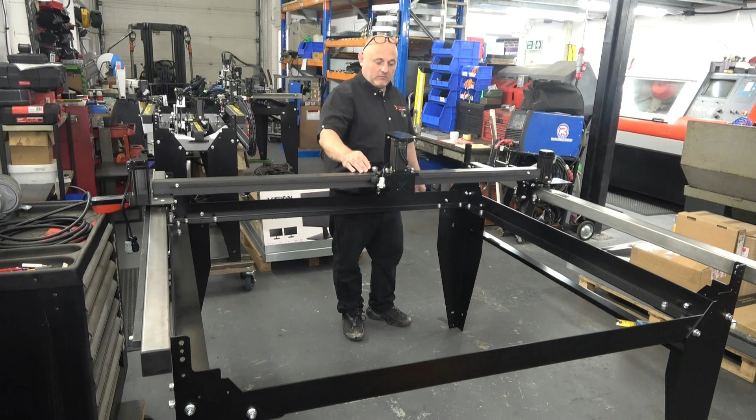Welcome to the first in possibly a two-part series of videos all about the latest software and the latest upgrades that Rob from Xtreme Plasma is now incorporating in the latest tables.

I sent the control box, the PC and the Z-axis away to Rob at Xtreme Plasma. It came back, the Z-axis has been modified, there's a new little PC and modified control box. I fitted it on at the table, a bit of wiring, nothing out of the ordinary, simple enough to do. Really good, comprehensive instructions. I quite enjoyed doing all the mods - it gives us a good chance to tidy things up.

I've stopped using the console and bought a little cupboard, not an expensive one, I'll show you that. So all the stuff now is inside there, away from all the nasty sparks and dust.

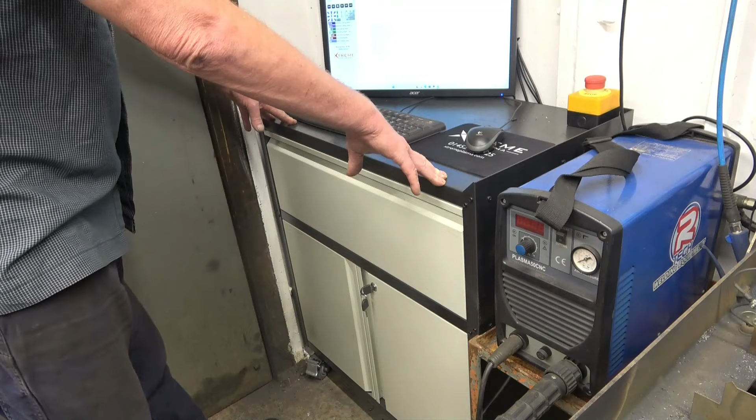This is the little cabinet I bought. It comes flat packed, didn't take much putting together. Screen on there, keyboard, mouse and mouse pad, and I put the stop switch on there, the e-stop button - that's very important so you can get to that. It's got a drawer here which as usual is full of my junk, but you can keep your nozzles, welding screens, all your consumables, things you don't want to get dirty.

I open the cupboard door, the control box is in there. That's a new little PC, quite an incredible little thing. Everything's out of harm's way. It gets quite warm in there with the heat off this, so I've put my welding rods in there to keep warm and dry out. I'm really pleased with this setup, I should have done it years ago.

I'm still using the R-Tech 45 amp plasma cutter I've had for a long time. I think I'm possibly going to get one of the new ones and do a review on that, but this has been no problem at all - it's been a good little cutter.

Originally I had the PC screen mounted onto the wall up here somewhere. It didn't take long to realise it wants to be here because you're sitting here, you're working your PC and there's no neck strain, it's absolutely spot on. So I'm going to take that off and get a desk mount for it.

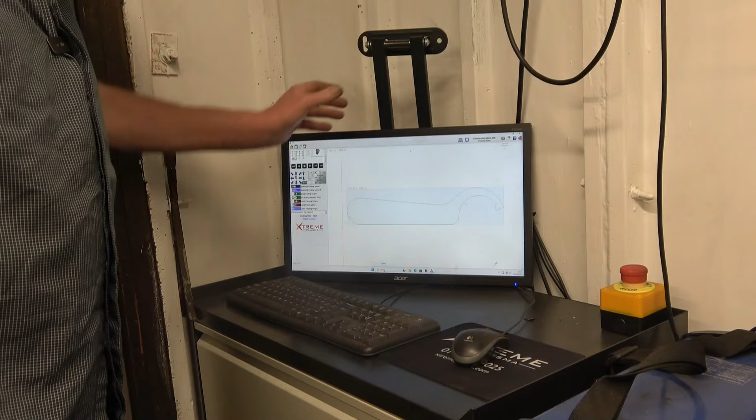I have played with the software, I've read the tutorial. There's loads of tutorials online to show you how to use the MyCam software.

I do fancy a weekend away, so the wife and I are going to go down to Gloucester to Rob's factory, and Rob's going to give us some one-on-one tuition on this software because he knows it inside out. I'm going to ask the sort of questions you don't find being asked on YouTube videos - not stupid questions, but how do you do this, how do you do that. Rob will hopefully show exactly how it's done.

In the second part, I'm going to go more into the mechanical side of things, the latest upgrades on the newer tables he's building. I started off with a 2-foot square table, a really little one, and progressed up to a 2x4. It's got all the latest updates on it, carriages, stepper motor drives, loads of different bits and pieces, and now I've got the latest software.

So this 8-year-old table is up to date - that's the way he's designed them. Everything is retrofitted, so you can go back to the first table and something off the first table will fit something on the last table.

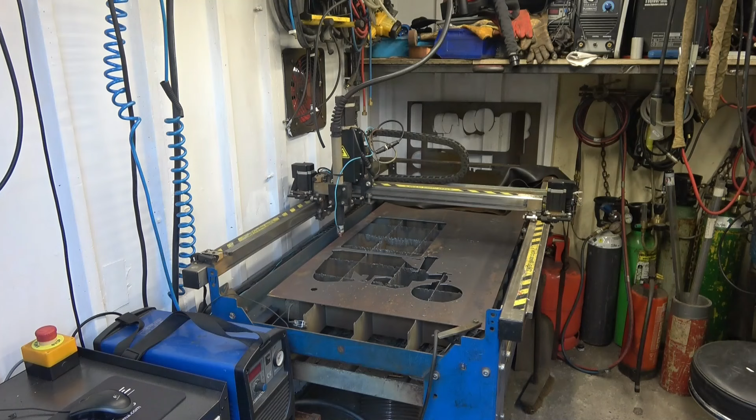That's obviously my table, 2 foot by 4 foot, in exactly the same place as it was. I've got some wiring to tidy up, the blue wire, that's the new ohmic sensor. That's the thing that does away with the old-fashioned torch height control - that in itself is a game changer.

I've just shown the table setup I've got now with the new software in. I've actually got to run down to Gloucester to see my friend Rob at Xtreme Plasma, and I'm going to get a bit of a tutorial on how to use the software. The tutorial that comes with the software is pretty good, but you can't really beat one-on-one with somebody that knows what they're talking about. So I'm sure Rob's in here somewhere, we'll have a look, see if we can find him and see what the day brings.

Hello John. Hi Rob, how are you doing mate? Thanks for coming down. Nice to see you. Pleasure, anytime. Welcome - well, it's a bit of an Aladdin's cave, being a welder and a motor mechanic. I'm amazed at how much stuff you've got in such a small space.

We've got everything, yeah, I have. And so you're stocking the R-Tech stuff? The power weld stuff as well - the new range is fantastic. So you actually stock these units as well? Yeah, I got them in.

So what we do is we've got them in stock, so people come to our shop, they can take them away. That's good. Because I don't like how some shops advertise that they can drop ship and all that. We like it so people can come out, we can talk about the welding equipment, they're happy, they take it away. So that's what we got.

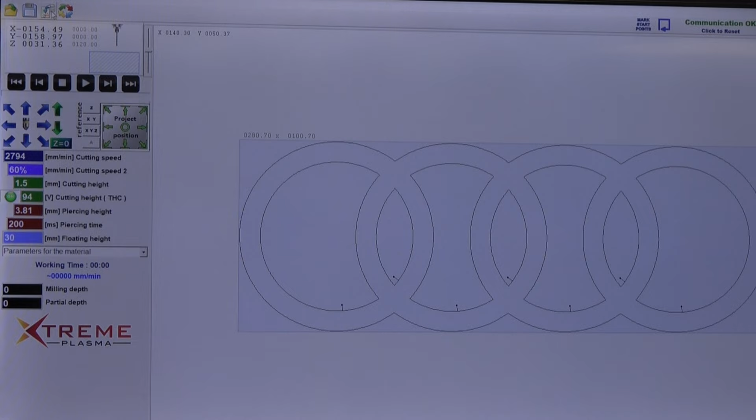Third icon across. We've got a shape already in now, which is a simple square and circle. We're going to send that now to the CAM. That's sent it now for processing. Think of this as the old SheetCAM - you sent it in for processing.

Because we've got the My Mini CAM module on, the tick is yes, that's the job, yes everything's correct by just quickly looking over the lead-ins. To be fair, most jobs you bring in, you just press - it will be right, it'll be ready. As you can see, it's got the lead-ins already done for you.

It's ready. So we will now move this torch to anywhere on the plate where we can fit this size shape in. So pressing the arrow keys moves the torch, pressing shift and the arrow keys will speed it up a lot quicker.

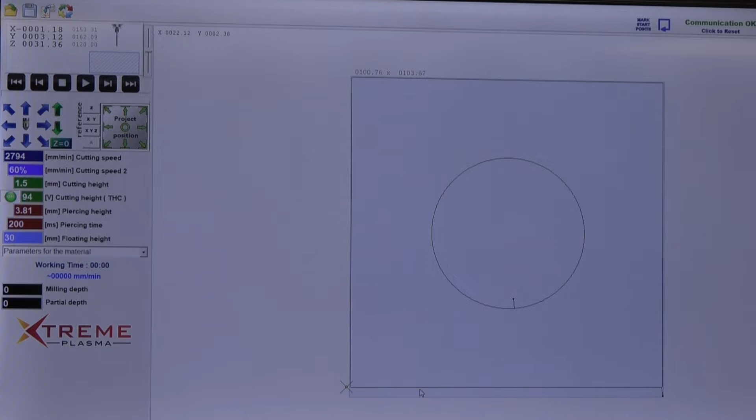And you will see this crosshair come up, that is identifying your torch. If you use the middle mouse button, you can zoom out and you can see the table extents - where we are on the table in relationship to the material.

Because you can move the job to suit, you can actually move the job to suit that, or you can move the torch to suit the material. You've got the bottom left-hand corner as the normal starting point, which is this position - that's where the torch is going to start.

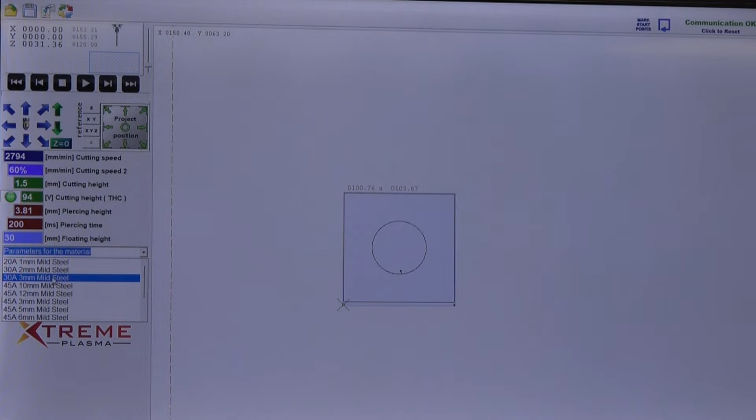So now from here, we'd select the material, the thickness. You like using 30 amp, 3mm, 30 amp. Also you would set your Z height - you bring it down to touch the plate, and then you would press the other button, Z equals 0.

That will then tell the machine if there's no plate there, missing, because if it can't find the plate - like if it's over a hole - if it tried to reposition itself and you've got a hole there, it goes 'there's no plate there' and it would stop for you. So it's got some safety features built in.

So it makes things a lot easier. So we'll just press play, and then it'll go.

So what about your torch height control? That is all built in. It does it automatically, you don't have to worry about it. So there's no more little knobs and little boxes?

No, you can play with it a little bit more if you want to, but you wouldn't want to. No, you just want to cut things up. If you put 0 into where it says cutting height on the THC, that makes it fully automatic - that just takes all the guesswork out. So that torch will stay at 1.5mm or above it.

Well, it will fluctuate - it'll be 1.5, but the Z will rise or lower depending on where the plate is in position. That's it? That's it, done.

Right, I want to make that bigger. How can I make that shape? Okay, we will go back - so 50% bigger than what it is? Go back to the import, that's our job still in there. Over here we've got a scaling tool, click on that. It tells you your current size, which was 100 by 100.

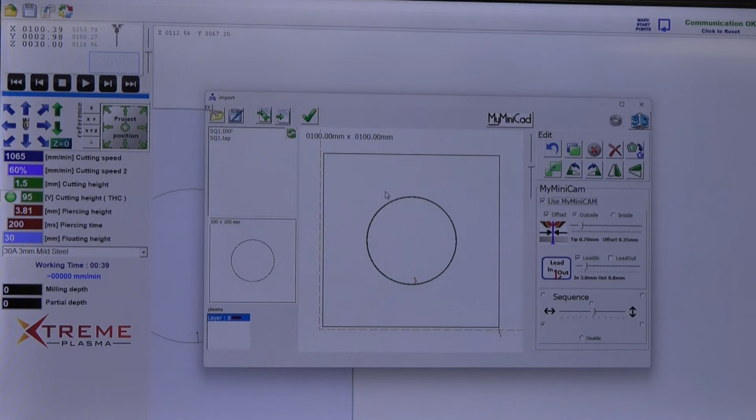So suppose the drawing was a horse or a wagon and I wanted to make the whole thing - would you proportionally make it bigger? Yep, so let me go back to find some example files for you. We've got quite a few example files already for testing, these are just testing practice files. So it's the horse - okay, we'll send that to the machine.

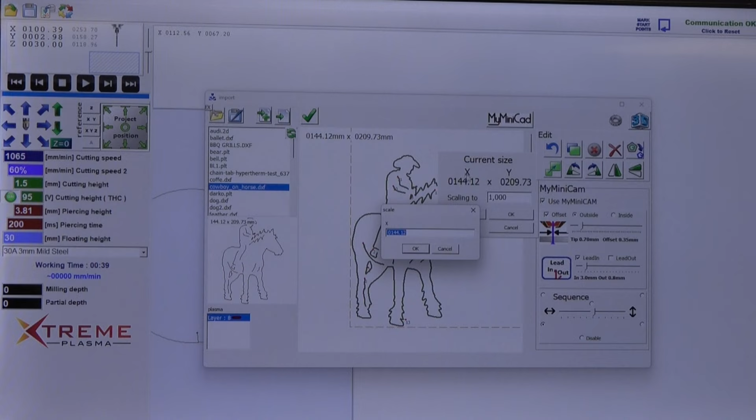From here, the horse is already in here. So press the scale button. At the moment, this current size is set to 144.12. So if I want to make it 300, click on the number, go 300, and that now will rescale. So that stretches - as you can see, it stretches, it's out of the table extent as well.

It's too big for the table, and that's what that red marker is - that's what you need to know. So we could then rescale it and make it 280, or just enough to get it into what you've got to play with. So just 270.

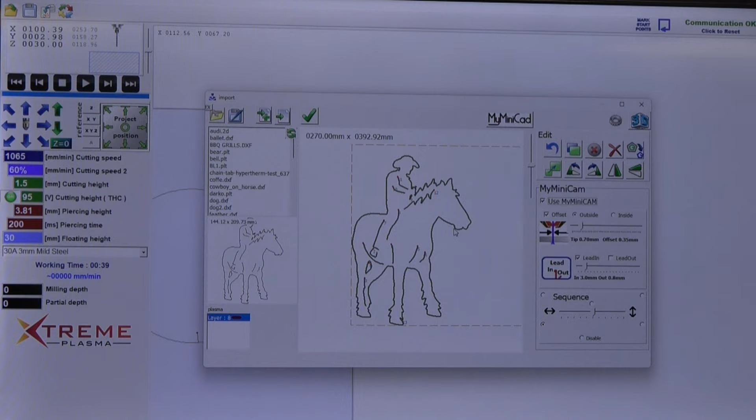And that's it, press the tick, and obviously where the torch is, it's saying you can't cut it from where the torch is at the moment, so you've got to move the torch. That's it, moving there. So move the torch to where you would want on the plate, which is normally the bottom left hand corner. So you could put the torch there still - if you had a piece of material there, it doesn't have to be right in that corner. Is it right? And it would bring it in. And then you would just press play.

And off you go, so it shows you which part it's cutting. Again, you can stop at any time. It's certainly easy, it's easier than Mach3. It's simple, it's not telling you nothing you don't need to know. It tells you enough, that's all you need - all I need to know is enough to make it work. That's it, it's just made it simplified. We don't have to be rocket scientists to use these machines.

I mean, there are other machines out in the market, and I think some of their software is such a fluff - it's like, oh, you're not into it. People just want to cut.

So we can stop that, and we can also forward it to parts, so again, forwarding or reversing, you can go anywhere on the drawing. If something's gone wrong - something went wrong, you want to change a tip or something, the tip load or something where you lost your air pressure - you could stop and go back, just go back to any part.

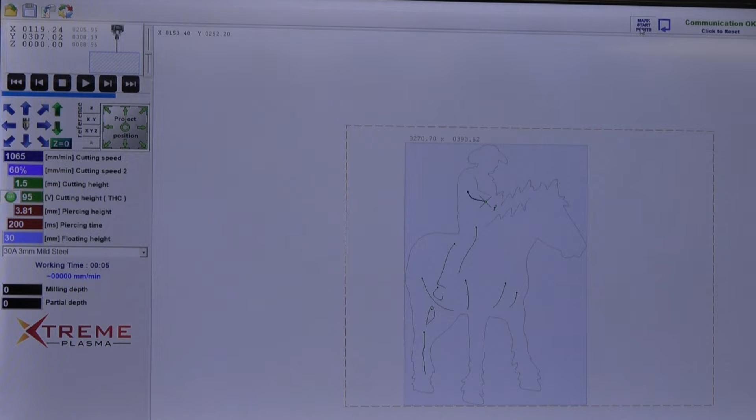Because if you had a 100 amp machine, it's got more power to blow the molten metal through. But because we've got 45 amp machines, what we can do to limit any problems is we can press the mark start points button, which is at the top - this is like the traditional pierce for thick plate. So with that button on, if we just start from the beginning and press play, it would go to all the piercing positions.

Right, so just pierce, then you can scrape the dross off and cut it when it's done. So like you just said, you've done all the piercing, so you can use an older tip if you want, because what kills tips is piercing, not cutting so much.

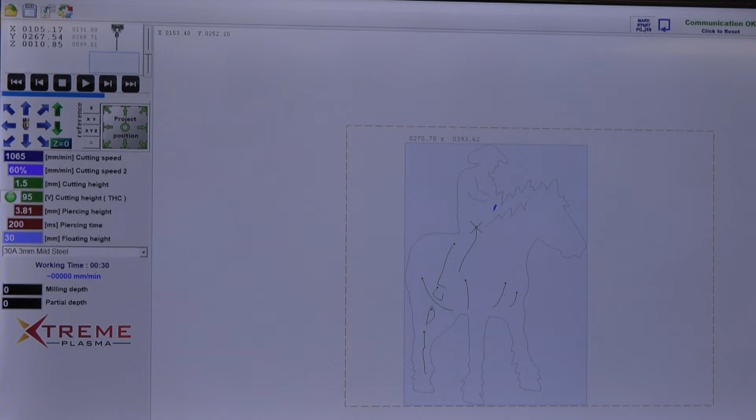So it'll put all the pierce points in, and then it'll cut it, finishing at the end. Then you'd take the mark start points off - just press stop, take the mark start points off, go back to the beginning, and carry on cutting again.

Because the hole's already there, it makes it a lot easier. It hasn't got to blow the hole through, so it's not likely to jam the torch when it moves, and it makes it so much easier to cut thicker plate materials. Once you're cutting thick plate and the tip is damaged, you'll see the part will have angles on it.

Yes, because the tip is damaged. People keep changing tips - the plasma arc is a teardrop shape arc, so you do get a taper, but it's because you haven't had all that molten blow back onto it. You're saving your nice clean tip for cutting, so you get a lot better result. So you could pierce your holes with an old tip, put a new tip in, and it wouldn't damage the tip to the extent piercing does.

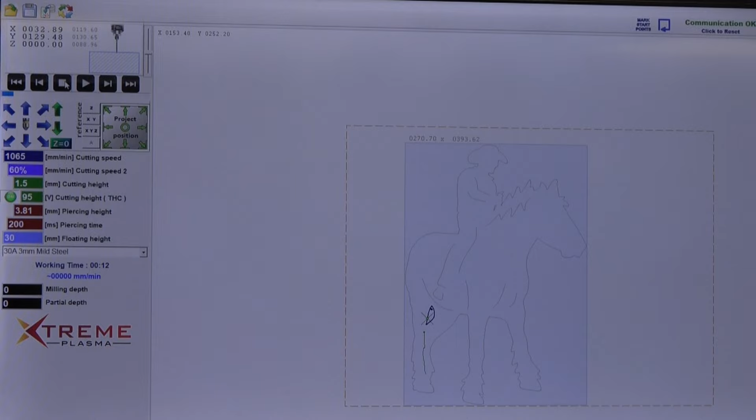Yes, because piercing - you can use some older tips you've had where the cut quality's not as good as you want, but use them for piercing. It's the same with oxy-fuel cutting - once you get the hole through, it's easy.

Basically you can turn things right down then. A lot of the plasma cutters really can cut a lot thicker material - it's that initial start, that hole. If you start on an edge, you can cut very good.

So that's the general little bits of that software. What other features would you like to know? I've kind of got enough to get by and do what I want to do.

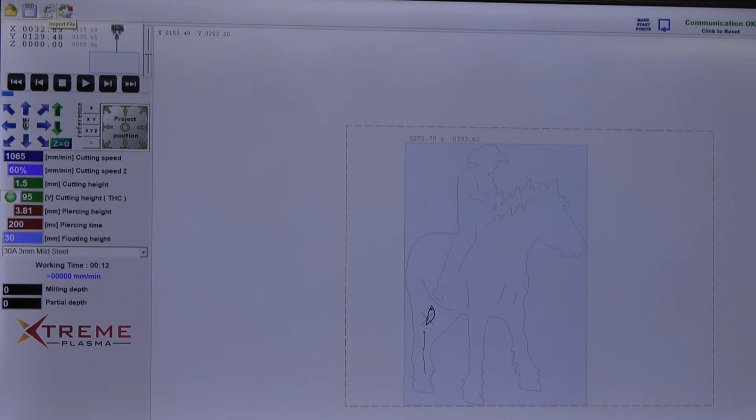Can I - I've downloaded this program on my house PC, so I can draw something at home and then go into the workshop. Yeah, but it's the same, just use a dongle - a USB stick, exactly the same as what you've been doing before. There's nothing different, this is just the software end of it.

The drawing side of it has never changed. I can still draw in machine shop, get my friend to send me a DXF file, and go straight in - I don't need to use SheetCAM, and I haven't got to use Mach3 anymore.

I think Mach3 was a fantastic program. I think one of the big features of this is the torch height control, because everybody struggles with touch - they just wing it. Well, it's 120 volts, would be all right - I know it like the back of my hand. That's your job, but I can understand some of the frustration.

You do a trial cut, watch your voltages, and aim for that. But one of the main things people were struggling with on torch height control is they didn't realize they had dross in the shield. If you had dross in the shield, it would give you false readings, so the torch would crash because it's actually shorting out.

But now this software will tell you - there's an alarm that comes out and it will always say ohmic. That's because there's a problem and it won't run. When I first started, I rang you up and you changed the tip and fixed it. It's got these little extra features which Mach3 doesn't have.

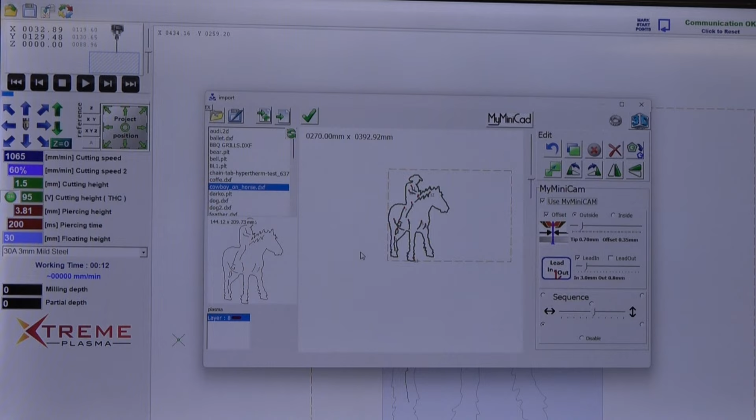But that's why I can offer it as an upgrade to all existing machines - that's the idea. Mine went from 2 foot to 2x4, then it had the new stepper motor mounts on, carriage mount, and now we've got the new software.

When you've got a design in and you want to show it to a customer, you can actually show what it's actually going to cut like - that's what it's going to be. Oh, that's good, that's clever. Yeah, just another inbuilt feature.